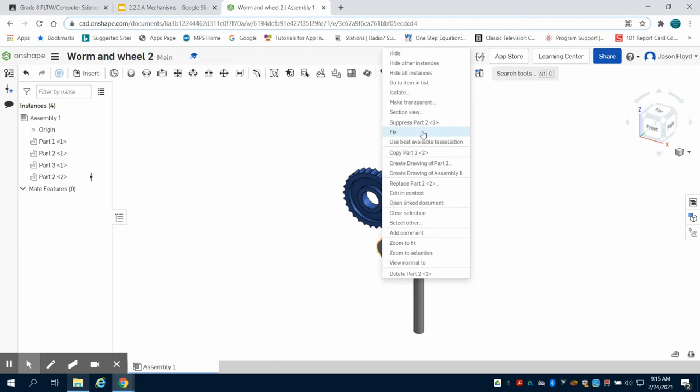In the previous video, we created our parts for our worm and wheel. Now we're going to assemble and animate them. So the first thing I'm going to do is I'm going to come to my bearing. I'm going to right click on it and I'm going to fix that bearing into place.

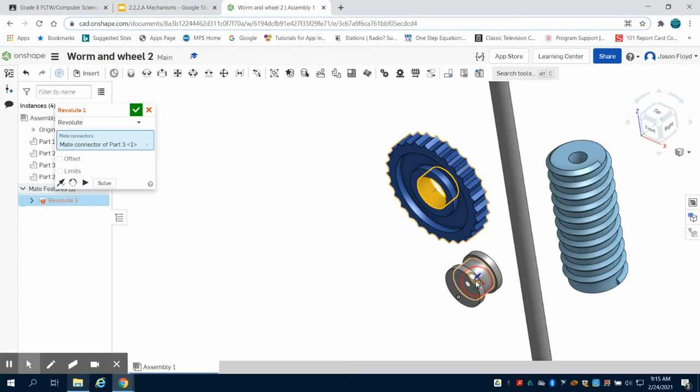So I'm going to come here and go to my revolute and I'm going to choose the center point of that hole right there. And I want to coincide that with the center point of my bearing. So the thing I can check, because I have that fixed now, is I can come here and I can exit here and I can revolve this gear to make sure it works.

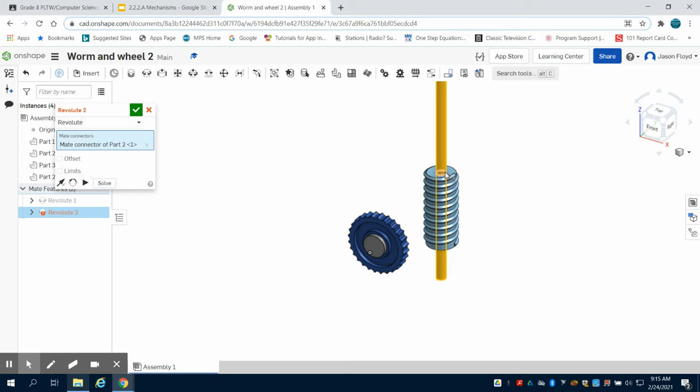The next thing I'm going to do is I'm going to choose that same revolute mate. I'm going to use the center point of my axle to the top hole, and the reason I'm doing that, it's just easier to find. And then I'm going to come over here and offset that by 1 inch to center that.

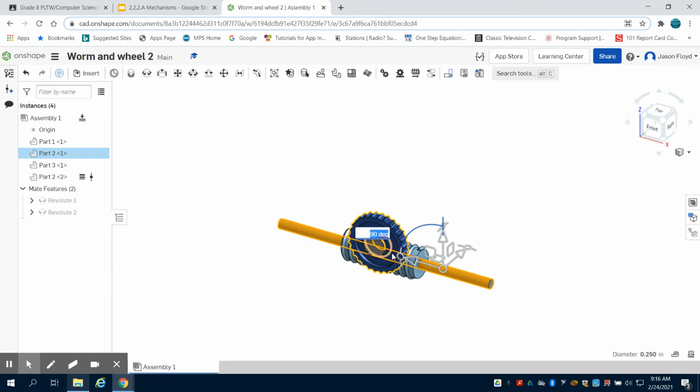Now, just for perspective's sake, I'm going to put this on top of this. So I'm going to double click on this, and again, I can rotate this 90 degrees by transforming it, and then we can see I have my worm and wheel.

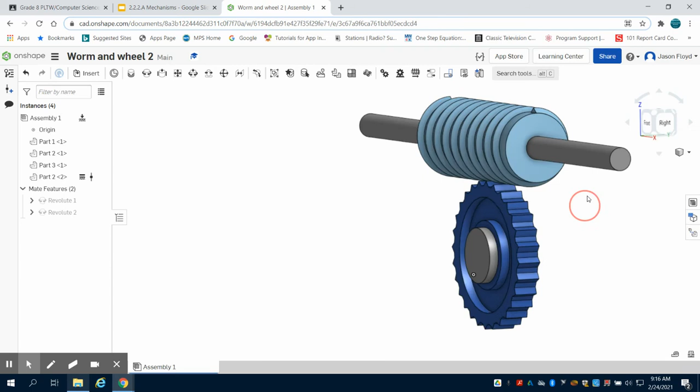So like in my previous videos, we're kind of just doing this in open space, so we don't have anything to attach it to, so we actually have to line our gears up. So I go to the front and the right views to line these up, and I'm going to come back to this and I'm going to move this a little more center, and let's come back to our front and we can drop this down a tad.

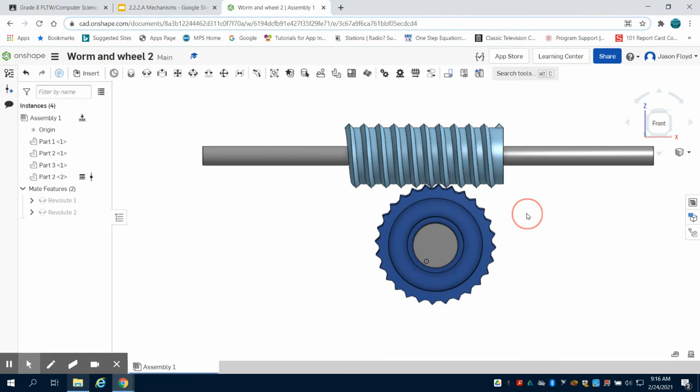Now again, if I was creating a part, I would have this axle running through something and I would have a bearing, or the bearing running through something of the axle to have these lined up. But for this demonstration, it looks like we're aligned.

So the next thing I'm going to do is I'm going to come up and set my gear relationship. The drive gear is on this axle, so I'm going to choose that first, which is our worm, and then I'm going to choose to do that with our gear for our revolution. Now, the relationship isn't 1-to-1. There are, I believe it was 28 here to 1, so 1 to 28 is our gear ratio, which actually comes out to 0.036.

So what that'll do is, by inputting the exact gear ratio in, when we animate this now, again, we've got to animate our worm. We're going to come to animate, and we can see this. Now, I always like to put it down a few more steps so we can see it happen a little quicker.

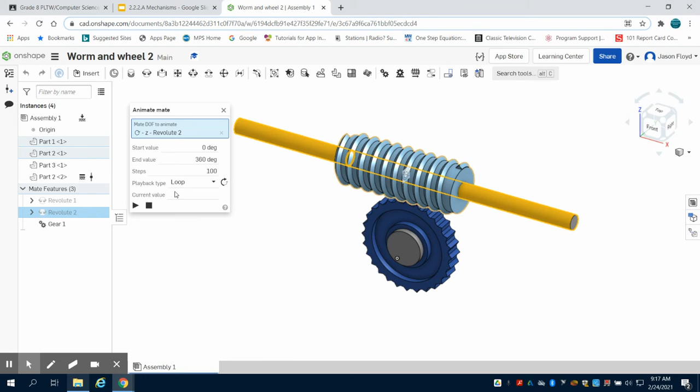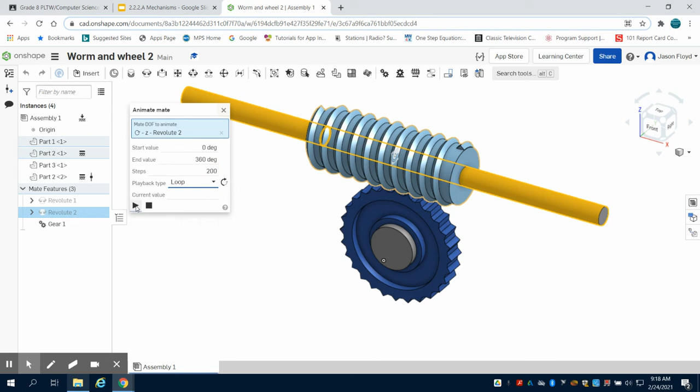And we have an error. And I know what that error is now. We didn't fix this axle. So I didn't fix it in this space, so we had nothing to revolve around. So I'm going to come back here. I'm going to animate. Let's drop it down to 200. Let's loop this. And now we'll see that worm spinning, and then faster than the actual wheel.

Now when I do this over the Screencastify, it doesn't spin as quickly on my computer as when it doesn't run. So when you run yours, you should see the relationship running a little bit more clearly.